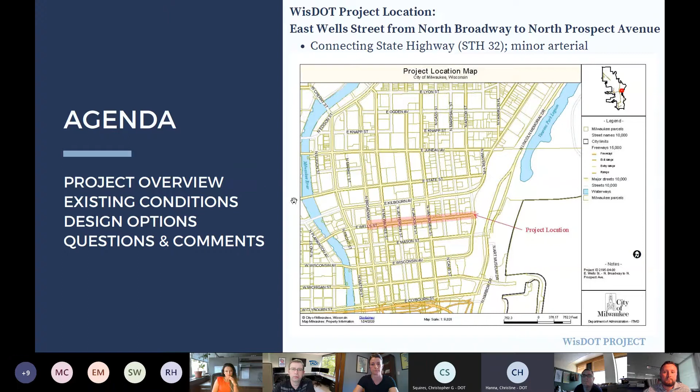So like you see on the screen here, this is the agenda for how we're going to be holding this meeting. We'll start with the project overview, the current existing condition for the roadway, some of the design options and alternatives we'll share with you, and finally we'll open it for questions and comments. Note this is connecting Highway 32, a minor arterial roadway on Wells Street, starting from North Broadway to North Prospect Avenue.

So what is the scope of work? The scope of work is pretty much to remove and replace pavement face-to-face of the curb. That means new curb and gutter, driveway approaches will be replaced, new sidewalk if needed, and ADA pedestrian curb ramps will all be replaced. We'll also be upgrading any drainage structures, traffic signals, and street lighting.

The goals of this project are to make the travel lane safer and more comfortable for everyone, improve conditions for walking and biking and pedestrians, upgrade pavement surfaces to make them smoother and more comfortable for all modes of travelers, and increase public space for commercial and dining establishments.

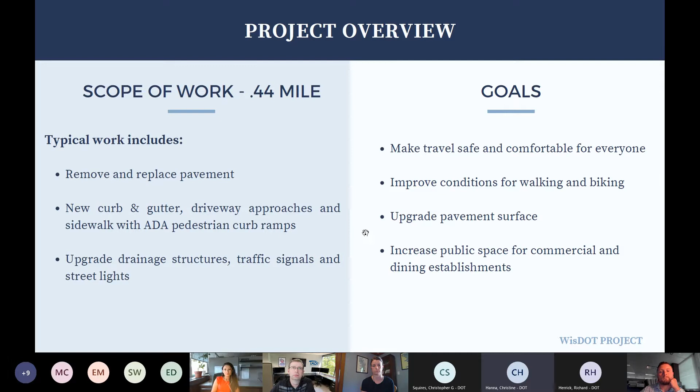So how is this project going to be funded? Construction funding is about $4.5 to $5 million dollars invested in this project. 45% of it will be shared federal and state funds, and 55% is City of Milwaukee funds. We are anticipating some assessment to property owners and minor real estate acquisition.

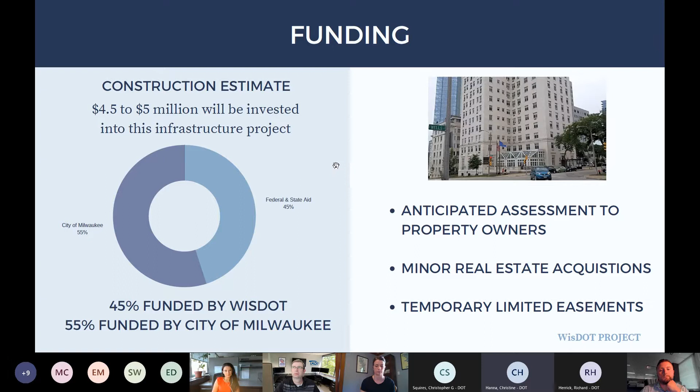What does that mean? When we're replacing curb ramps, the contractor needs some space to work, so we'll have temporary limited easements for them to step onto private properties to complete the work, but full acquisition is not anticipated as of today.

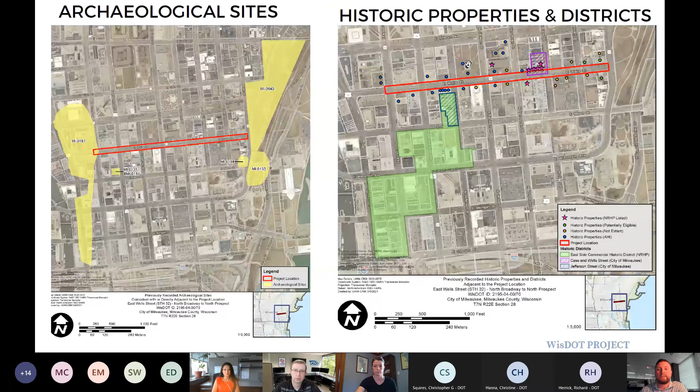Something to mention is that this project is near historic and archaeological sites. The archaeological sites are on both ends of the project, and we're right through a historical district. If anyone in the comments or discussion section wants to add information, you're more than welcome.

We want to talk about the design options, what everyone thought, what did you like? Did you like the additional public space for sidewalk or patio seating between Broadway and Van Buren? Can parking be consolidated to one side east of Van Buren? Is there anything else you'd like to see out there? This is the point where you can chime in, talk about the options, what you liked, or if you had questions.

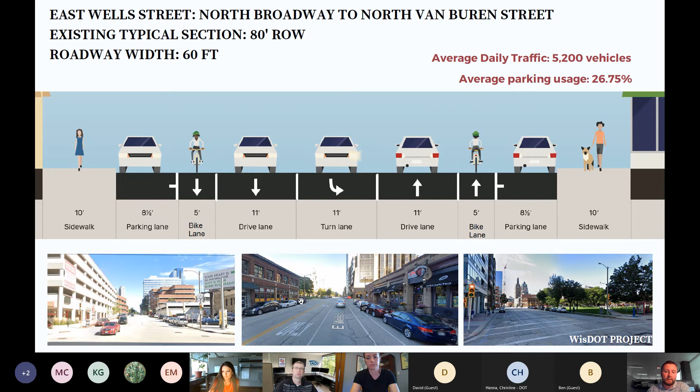I remember, Ben was asking about parking structures, and these two are heavily used and utilized. You can see in the pictures down here that the parking lanes are pretty much full. So I want to keep that into consideration.

It doesn't seem like a lot of people that live along this street are attending this meeting, but I just want to do what's, like I said, balance the needs of all the users.

Nick and Megan, I had another thought. If the preferred solution in the end does have contiguous parking lanes, I know a lot of the businesses on this street have taken advantage of our Active Streets for Business program to have parklets in the parking lane where they actually have outdoor dining. That might be an opportunity to engage those businesses to see if they'd potentially like to make something like that permanent, with extended bump outs, or maybe don't necessarily try to maximize street parking. You can find ways to either add green infrastructure or outdoor dining or even wider sidewalks.

Just another thought, because I think some of those businesses over the past year have come to really appreciate that extra sidewalk space. And if they are west of Van Buren, their sidewalks are about to get a lot larger, which would help in the sidewalk seating areas you're talking about.

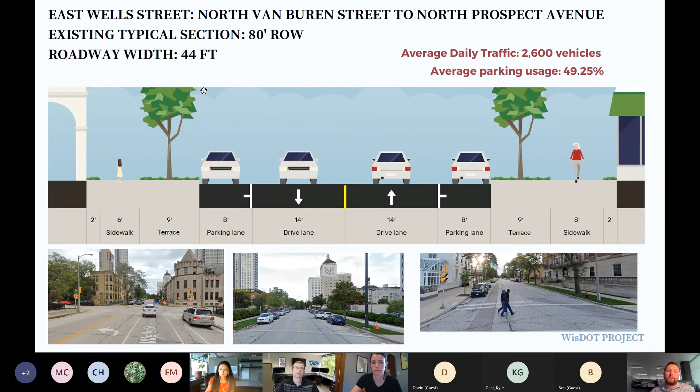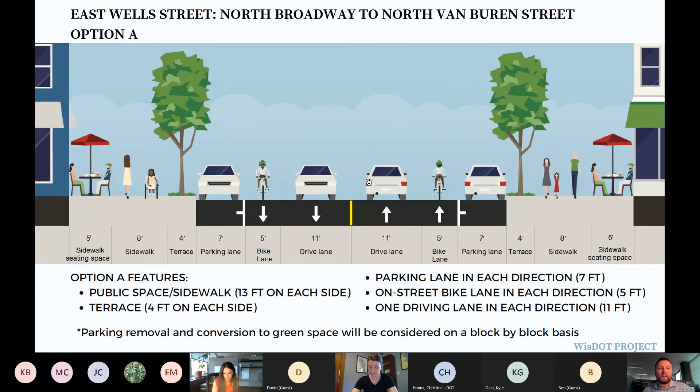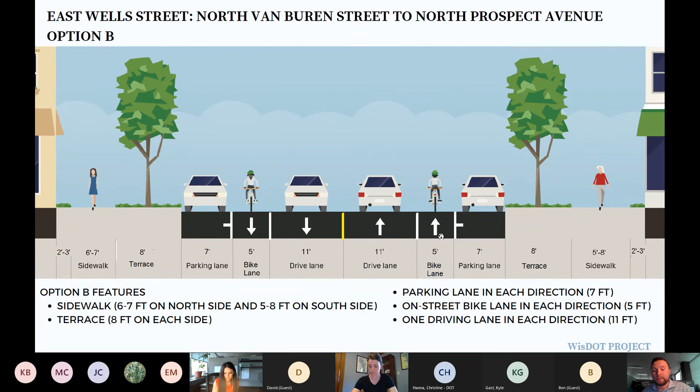As far as Broadway to Van Buren, there was a comment that the narrower cross section would be better than the 1-foot wider cross section. As for Van Buren to Prospect, most of the conversation was about the trade-offs between higher level bicycle facilities and parking.

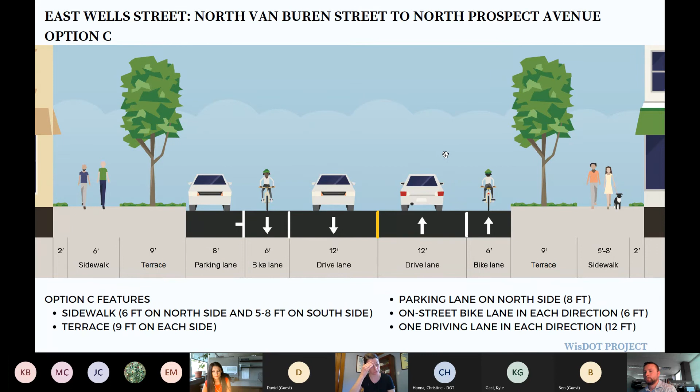I would include green infrastructure in areas where there's a possibility of reducing the driving lane, where we can implement green infrastructure or use that space for pedestrians or bike lanes. I think you covered it.

Ben has his hand raised. Ben, feel free to go ahead. I'm fully in support of green infrastructure as well, but I'm wondering if green striped bike lanes are in consideration, and/or bike boxes, as found in Wauwatosa. Generally in the past we've used green bike lanes in conflict zones, like in front of a freeway on-ramp, or where there's a conflict point between turning vehicles and bike lanes. I won't say it's not possible, but if used, it would likely be in conflict areas. Such as Van Buren, for instance? Potentially, that would be great. Thank you.